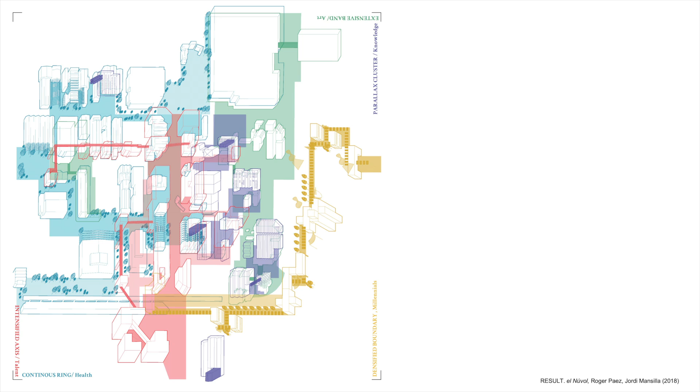So this is one of the results of one of these games, drawn as it comes out directly of the game. And so this game, in a way, is like a sophisticated version of Monopoly, but not designed for capitalist greed only. Essentially, it plays along the same ideas.

What's interesting about that is that it allows for very strategic decisions to be made and negotiated without necessarily going directly into a formalization, which sometimes becomes more problematic. But then based on that, we worked on highly detailed, even formalizations of projects that came out of that with different kinds of students, over the 2 years.

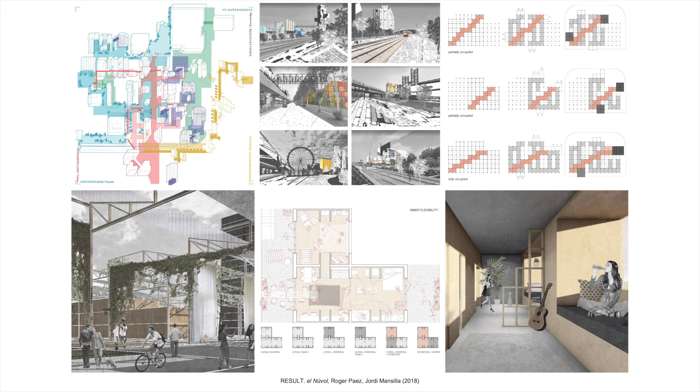As you can see here, I'm not going to go in detail, but the point is that even at this very large scale and this very strategic sort of move, it also gave a very strong framework for very detailed architectural and urban projects to be developed, and some of them to be developed as final master's projects to a lot of technical detail.

And the last one, which I'm just going to go very quickly through, is kind of the grandmother of the one that we're doing now, called Speculative Urban Futures, which essentially uses speculative urban design, what-if cards with questions that again take weak signals and sort of extend them or exacerbate them in a near future.

Essentially the idea is that we're asking designers right now to think radically in these terms. What if some of the possible futures that we're concerned about right now were actually the case relatively soon? How should we now be reacting to this? How should we be rethinking the way in which we're addressing urban and architectural design? What kind of challenges, what kind of methods, what kind of projects, what kind of impact should they have in order to care for this future to come? These are some of the initial ideas that came with that, which I'm going to go into detail.

And the last part that I wanted to present to you today is this part which I call serious games for radical urban visions, and this is published as a book chapter in a book that's about serious games precisely.

Where, funnily enough, I think I was the only architect on a very, very thick book. And to me, the question here was, how can we...

Reintroduce fun into serious games? Because to me, the problem with serious games is that they're not fun. If they're not fun, they're not games anymore. You don't want to play them, so it just defeats the purpose. So how can we introduce fun into serious games? Because if serious games are only used to test some very limited idea of what reality is or can be, and what professional skills or capacity building should be, I think that's a very poor way of addressing it.

Typically, serious games started as a way to, in the military, like nearly everything technology related, be used as ways of more cheaply testing fighter pilots' skills, for instance. But these serious games, to me, are extremely reductive. Essentially, they're not games. The only game aspect is that it says game over at the end and you don't die. But they're not games in the sense that they're not opening up this radical generative imagination that allows you to reinterpret the reality we're living in, in order to transform it, in our case as architects.

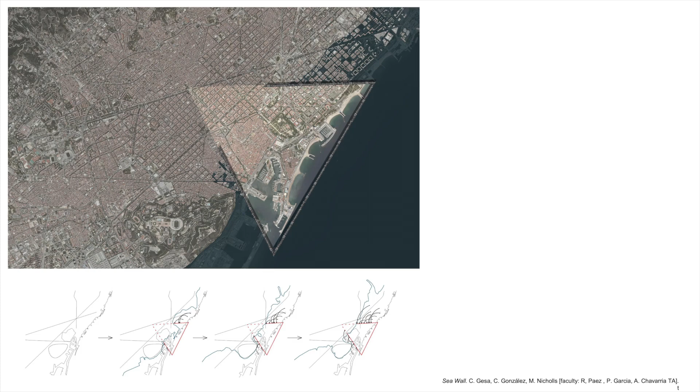So that's the account of a workshop that we did. In this case, it's undergrad, 4th and 5th year undergrad architecture school in Barcelona, where we proposed this project called Barcelona Radical Landscapes, and essentially the idea was to use some playful practices and game-based formats to proliferate imaginaries of Barcelona based on very complex, wicked problems having to do essentially with environmental aspects, social-cultural aspects, or demographic and economic aspects.

So taking some tendencies, some weak signals that are there, exacerbating them, taken to a level of extreme situations, but then thinking very creatively about what effects, potentially desirable effects, this could have on the city. In this case, this is a project called the Seawall.

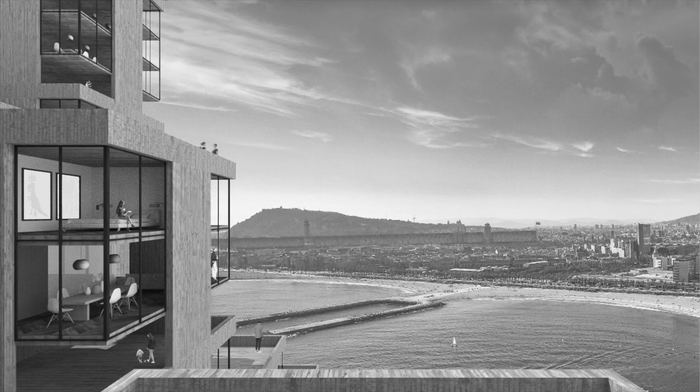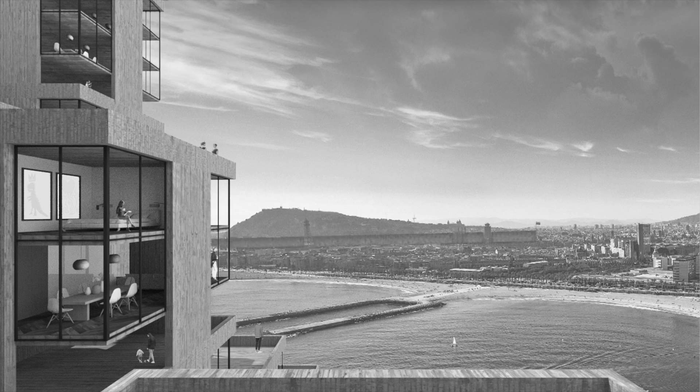It works with this idea, with the worst prediction on sea level rise in the Mediterranean in Barcelona. Rather than just be catastrophic about it, or conventionally engineering about it, trying to avoid the problem, here the idea was this quite radical concept of generating a seawall that would protect some parts of the city. Of course, which part is a problematic one, but that's another story.

And which would also be used as a place to generate a new kind of city, a quite radical linear city, where the people displaced from the flooded places could be living, but also other kinds of urban experiences, urban spaces, and urban relations could begin to be imagined.

There's some really strong images, like this one. I believe very much in the capacity of these images, again, to generate a new understanding of the possibilities of the challenges we have ahead.

But again, this is an architecture school, a technical architectural school, so it went down to the detail of testing how this could work and how this defense could work in terms of hydrodynamics, essentially, but also, and mostly, how it could be used as a way to reinvent a new kind of city.

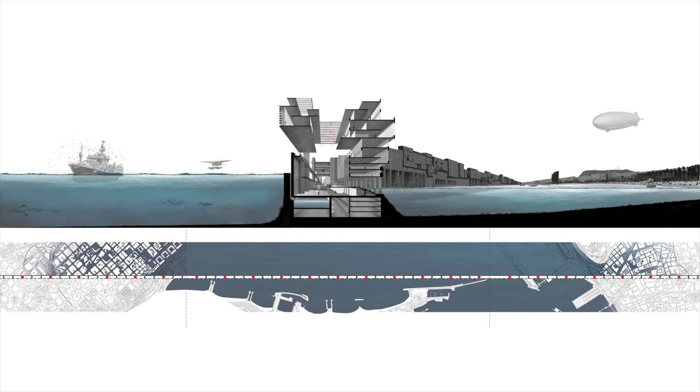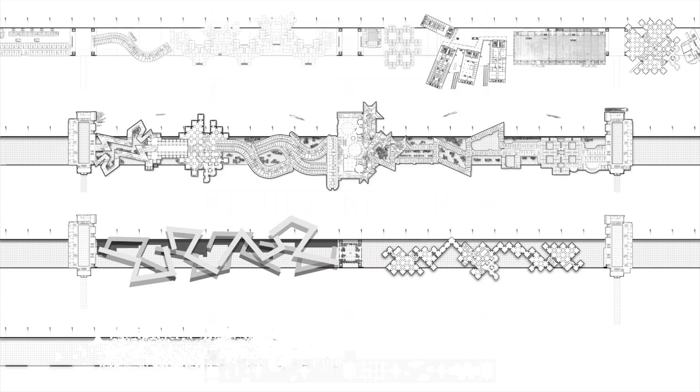So it goes from very detailed aspects of buildings, Hertzberger before, as you saw, to very diagrammatic approaches that understand how we could design this long line. There's very few things that need to be designed, and then how this line could essentially become some kind of new terrain vague, if you will, where all kinds of different things could happen.

And here it's just an exercise in hybridizing different kinds of architectural forms. So that was one. Another one that I will... No, I still have time, no? Yeah, another one...

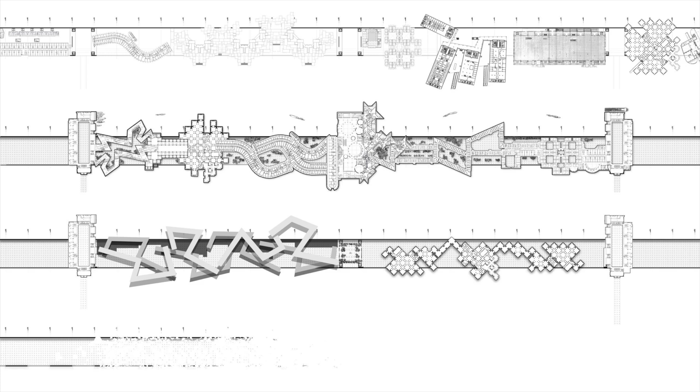...was this one that is working in a landfill in Barcelona, so a place that has been... It's essentially a fairly large platform that was supposed to be used for a specific purpose that never got built. And so there's this rather large expanse of land where there used to be sea. Right now, most of the year it's not used except for a very famous music festival called Primavera Sound that works there and activates the space for a few weeks a year.

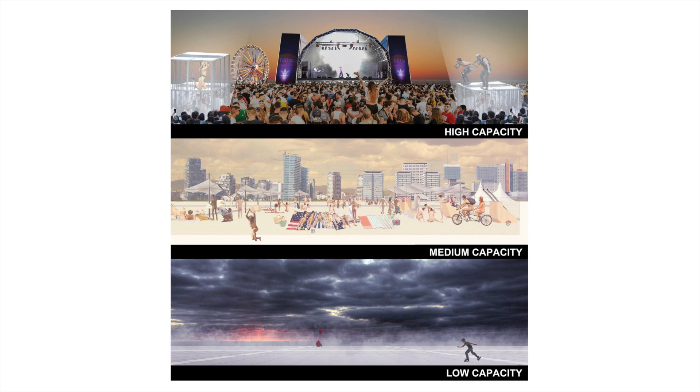But it's a fantastic space, it's already there, it's in a prime location, by the sea, and yet it is basically unused. So these people started thinking about how they could generate or build, if you will, a space for indetermination. How could we design an empty plot? How could we generate an architecture that's essentially an enabler, a technical enabler of many things to happen?

This, of course, is like a re-understanding of some of the work of Cedric Price, amongst others. But essentially, the idea here is that there's a very strong, clear, and assumed division between the infrastructure that generates this perfectly serviced flat space on top, and a superstructure where anything could happen - at high capacity, medium capacity, or very low capacity - and still have urban qualities that are untapped.

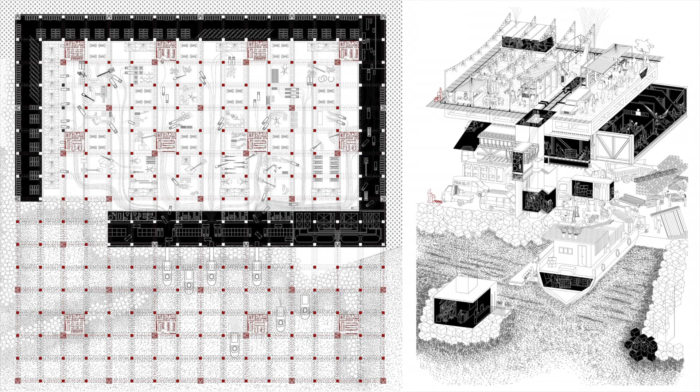So here you can see a plan on the left and some kind of axonometric detailing on the right on how this structure could work. This is very large scale, but it's essentially some kind of technical flooring at an urban scale that will be serving this totally horizontal and totally serviced space—some kind of the dream of Claude Parent and Yves Klein, if you will, made reality.

So that was also developed as a game, quite literally a geometry-based game, where based on the time or money that one had, you would be given different kinds of elements representing different configurations of the top floor, and based on that you could organize all the bottom aspects to temporarily generate any of these things—from urban farming to festivals to a 50-year birthday, or whatever you can imagine.

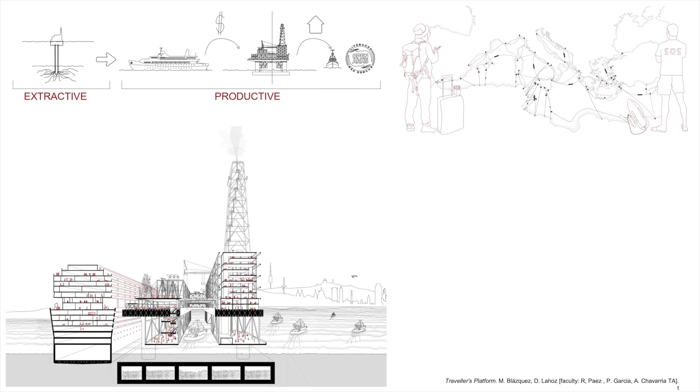And the last one I wanted to show of these serious games as radical urban visions tries to simultaneously address two very pressing questions. One was what to do with an existing, abandoned oil drilling structure off the coast of a city just south of Barcelona. The oil platform is still there because it's very expensive to dismantle, and it's not clear what to do with it. So at this point, we were trying to push for some kind of use of this oil platform.

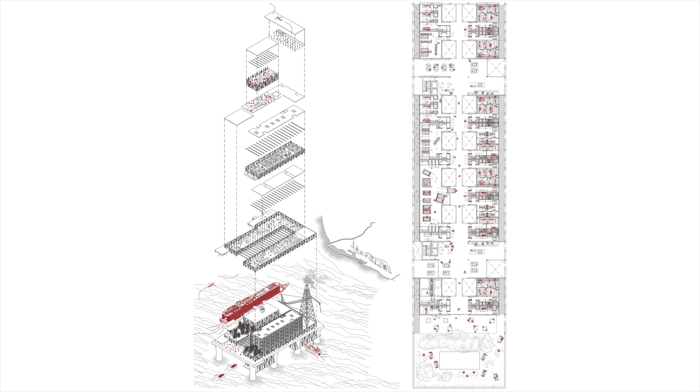And on the other hand, an even more pressing question in the case of Barcelona—you just wait, in Tallinn you're going to get it too—which is mass tourism. The idea here was: can we think of mass tourism not only as an extractive economy, but understand that this mass tourism-based economy could also be feeding other economies that are much more social or redistributive, to use Adrià's term. In a very speculative way, that was the proposal.

Now, how can we go from the extractive operation of the oil platform, which right now is underused, and reimagine it—transport it, actually—as a productive element that would allow, on one hand, solving a very important problem: the ferry terminal, the cruising terminal for Barcelona, which right now is in the port and generates a lot of pollution and other big problems.

And also to generate another space of, let's say, liminal legality to deal with the migratory crisis in the Mediterranean. But this ability that design sometimes has to make things very concrete and specific, generating visions that package these complex and extremely problematic questions together in a relatively synthetic way, is something with a lot of use well beyond the potentially instrumental use of all these practices I'm proposing to you.